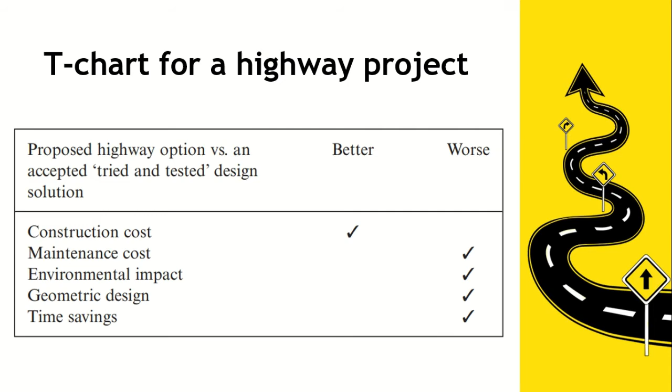The application of cost-benefit for project assessment in the highway area is made more complicated by the wide array of benefits associated with a given road initiative, some easier to translate into monetary values than others. Karamihan sa mga benefits ng improvements sa transport projects ay kung mababa ang magagastos dito. The primary grouping that contains this type of economic gain is termed user benefits. Benefits of this type accrue to those who will actively use the proposed installation. This group includes reductions in vehicle operating costs.

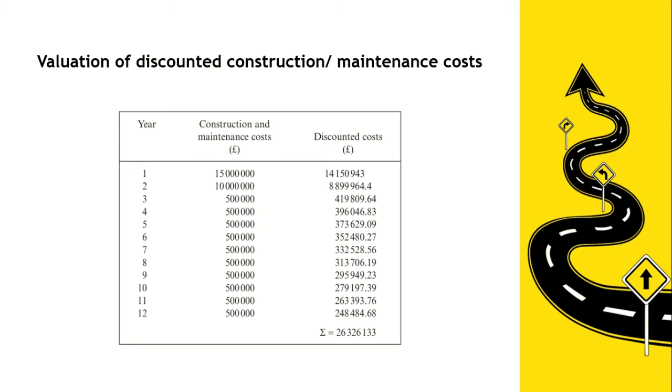Advantages and disadvantages of cost-benefit analysis. So dito meron tayong tinatawag na pure benefits, wherein ito yung nagme-measure ng net benefits with the project in relation to net benefits without the project. Ilan sa mga advantages nito ay the use of the common unit of measurement, money, facilitates comparisons between alternative highway proposals and hence aids the decision-making process.

Given that the focus of the method is on benefits and costs of the highway in question to the community as a whole, it offers a broader perspective than a narrow financial or investment appraisal concentrating only on the effects of the project on the project developers, be that the government or a group of investors funding a toll scheme.

Ilan naman sa disadvantages nito ay the primary basis for constructing a highway project may be a societal or environmental rather than economic one. The method is more suitable for comparing highway proposals designed to meet a given transport objective, rather than evaluating the absolute desirability of one project in isolation.

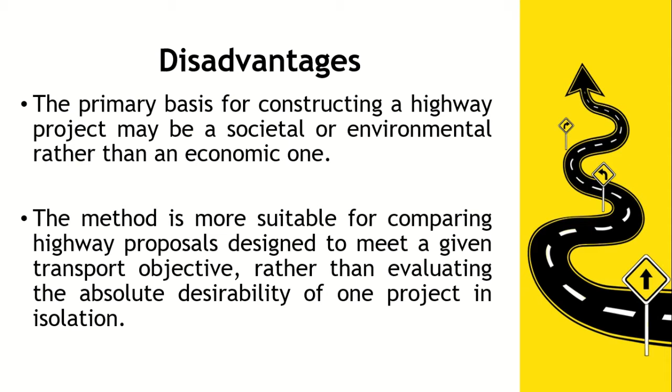Payback analysis. Payback analysis is an extremely simple procedure that is particularly useful in evaluating proposals such as privately funded highway projects where tolls will be imposed on users of the facility in order to recover construction costs. Sa method na ito, pinapakita yung estimate ng length of time taken for the project para ma-regain yung loss nila. Sa kabilang banda, ang method nito ay hindi ganun ka-accurate, di tulad ng mga formal economic techniques gaya ng CBA.

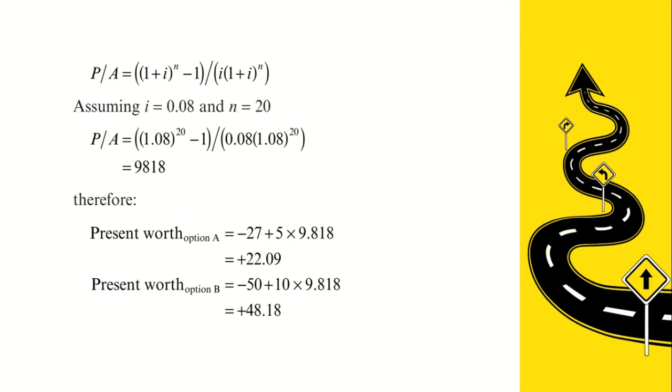So let's proceed to the environmental appraisal of highway scheme. Environmental evaluation requires an alternative analytical structure.

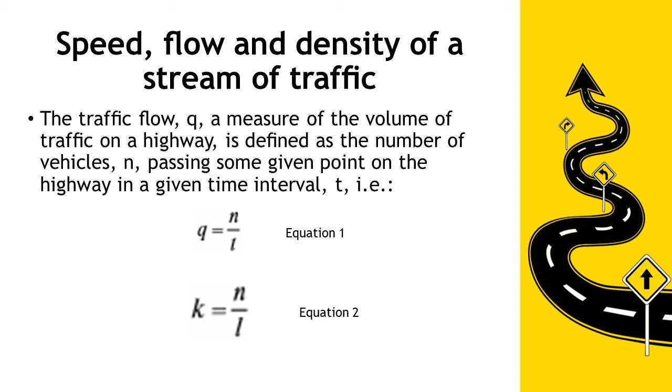Traffic density is a measure of the number of vehicles occupying a length of roadway. The average speed of the n vehicles is termed the space mean speed U, where L sub i is the length of road used for measuring the speed of the vehicle.

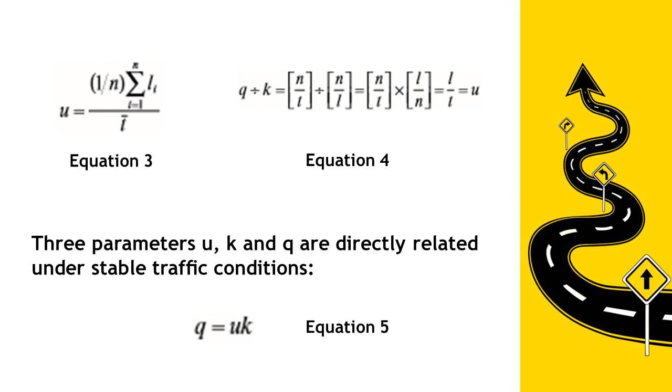It can be seen that if the expression for Q is divided by the expression for K, the expression for U is obtained, just like in equation 4. The three parameters U, K, and Q are directly related under stable traffic conditions, so the formula will be Q equals U times K.

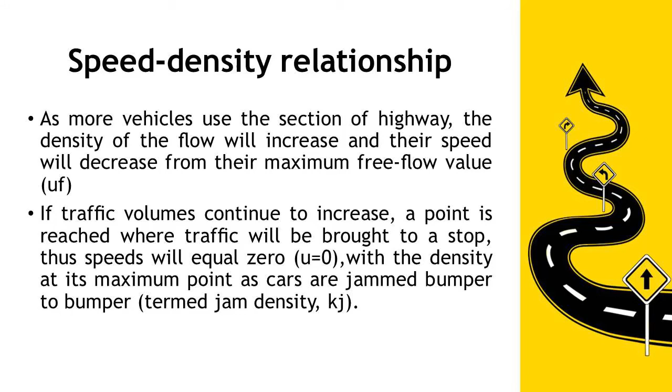Speed density relationship: as more vehicles use the section of highway, the density of the flow will increase and their speed will decrease from their maximum free flow value. If traffic volume continues to increase, a point is reached where traffic will be brought to a stop, so speed will equal zero while the density reaches its maximum point as cars are jammed bumper to bumper.

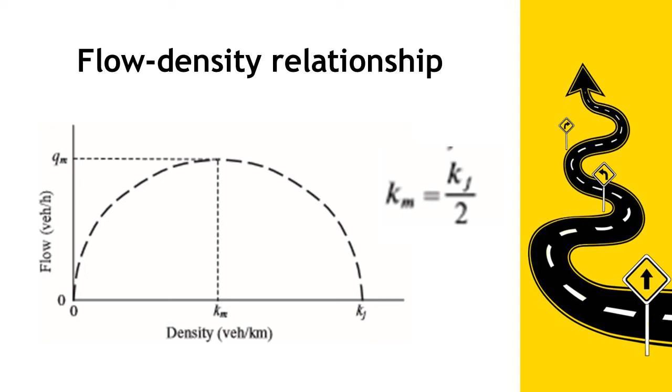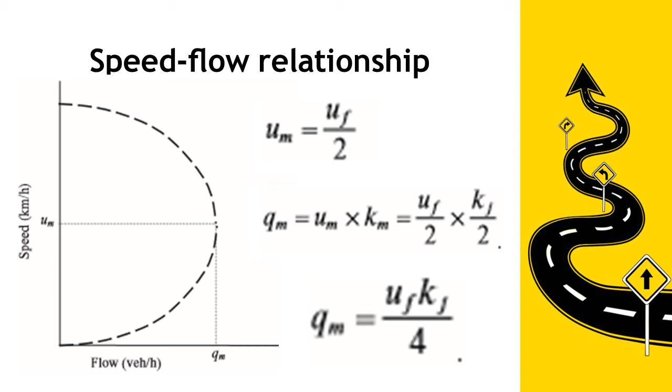And for the speed flow relationship, the speed at maximum flow is thus equal to half the free flow speed, and this will be the illustration of the speed flow relationship, wherein our formula is a combination of flow density and speed at maximum flow.

The level of service approach. Introduction. Level of service describes in a qualitative way the operational conditions for traffic from the viewpoint of the road user. It gauges the level of congestion on a highway in terms of variables such as travel time and traffic speed.

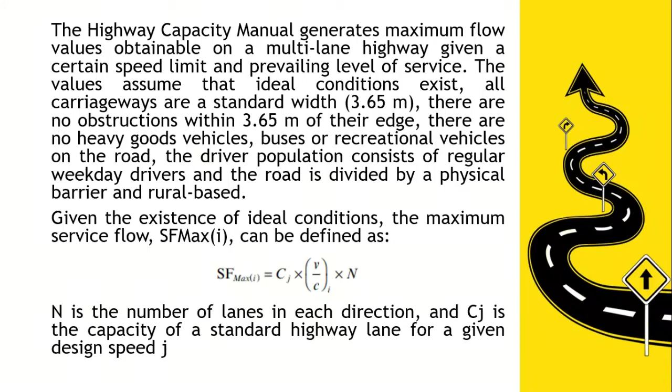Given the existence of ideal conditions, the maximum service flow SF max can be defined as SF max equals CJ times V over C times N, where N is the number of lanes in each direction, and CJ is the capacity of a standard highway lane for a given design speed J.

For non-ideal conditions, the previous equation becomes: SF equals CJ times V over C times N times FW times FHV times FP times FE.

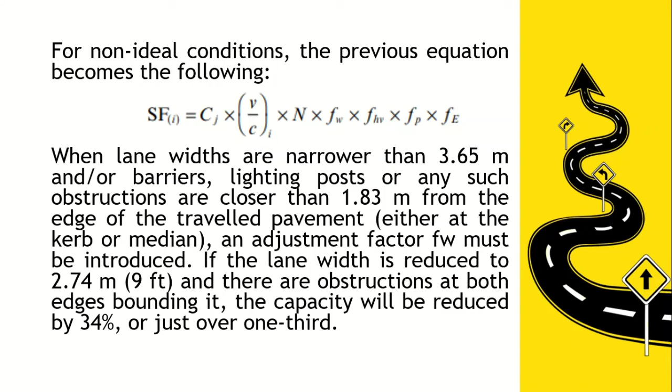A condition is considered non-ideal when lane widths are narrower than 3.65 meters, and/or barriers, lighting posts, or any such obstruction are closer than 1.83 meters from the edge of the traveled pavement, either at the curb or median. An adjustment factor FW must be introduced. If the lane width is reduced to 2.74 meters (9 feet) and there are obstructions at both edges bounding it, the capacity will be reduced by 34%, or just over one-third.

Maximum service flow rates for two-lane highways: where one lane is available for traffic in each direction, a classification of two-lane highway applies. In such a situation, if a driver wishes to overtake a slower moving vehicle, the opposing lane must be utilized. This maneuver is therefore subject to geometric constraints, most noticeably passing sight distances, but also the terrain of the stretch of road in question.

The capacity of such highways is expressed as a two-directional value rather than the one-directional value used in the previous section for multi-lane highways. Under ideal conditions, the capacity of a two-lane highway is set at 2,800 passenger car units per hour. If one adjusts this value by a ratio of flow to capacity consistent with the desired level of service, the following formula for service flow is obtained: service flow divided by 2,800 equals V over C.

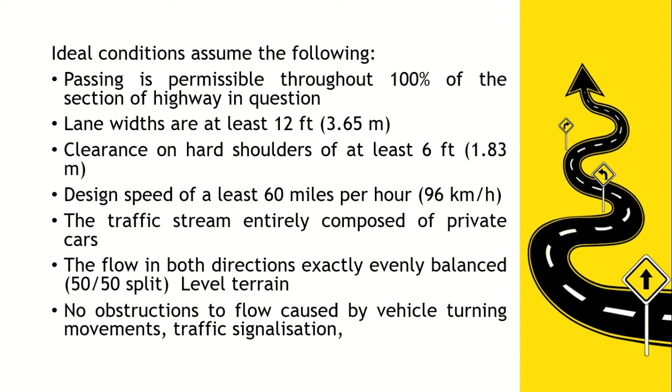Ideal conditions assume the following: passing is permissible throughout 100% of the section of highway in question; lane widths are at least 12 feet or 3.65 meters; clearance on hard shoulders of at least 6 feet or 1.83 meters; design speed of at least 60 miles per hour or 96 kilometers per hour; traffic stream entirely composed of private cars; the flow in both directions exactly evenly balanced, on level terrain; and no obstructions to flow caused by vehicle turning movements or traffic signalization.

When the condition is non-ideal, the capacity of the highway reduces from 2,800 PCU per hour based on the following equation: SF divided by 2,800 equals V over C times FD times FW times FHV.

Sizing a road using the Highway Capacity Manual approach: when sizing a new roadway, a desired level of service is chosen by the designer. This value is then used in conjunction with the design traffic volume in order to select an appropriate cross-section for the highway. It is a common practice to use a peak hour between the 10th and 50th highest volume hour of the year, with the 30th highest being the most widely used.

In order to derive this value for a highway, the Annual Average Daily Traffic (AADT) for the highway is multiplied by a term called the K factor, such that Design Hourly Volume equals K times AADT, where the value of K corresponds to the 30th highest annual hourly volume. Since DHV is a two-directional flow, the flow in the peak direction, the Directional Design Hourly Volume (DDHV), is estimated by multiplying it by a directional factor D. So DDHV equals K times D times AADT.

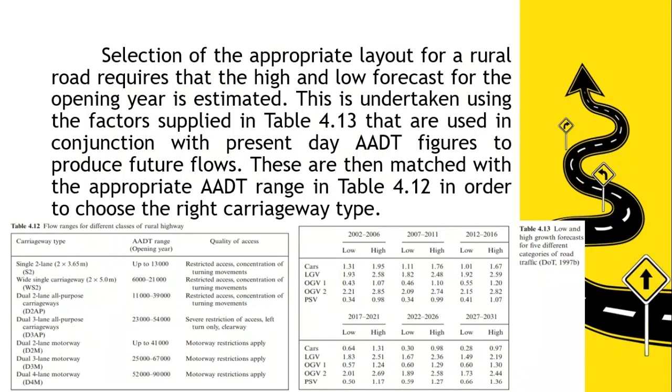Traffic was split into the following five categories: cars, including taxis, minibuses, and camper vans; light goods vehicles (LGVs), all car-type delivery vans excluding those with twin rear tires; other goods vehicles (OGV1), all goods vehicles with either 2 axles with twin rear tires, 3 axles rigid, or miscellaneous vehicles such as ambulances and tractors; other goods vehicles (OGV2), all goods vehicles with either 3 axles articulated or 4 or more axles rigid or articulated; and buses and coaches (PSV), buses and minibuses with a capacity for more than 6 passengers.